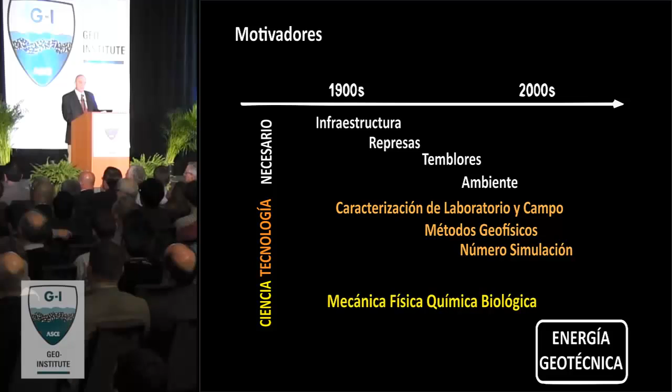Now, whenever we were challenged by these new needs, we looked back into the foundations of knowledge. We went back to the sciences. We re-explored the mechanics, the physics, the chemistry, and more recently, the biology. Today, I would like to do the same as we explore the energy challenge.

Why energy? Well, because whenever we seek the ultimate goal, which is to have a pleasant life with great quality of life, we see that it is basically controlled by the availability of energy. It is so much so that if we plot most quality of life indicators, they exhibit a great correlation with power consumption, that being life expectancy, infant mortality, ability to receive an education.

Some of these parameters can be combined to make it even more predictive of future energy needs. And in this case, there is some combination here of those parameters into an index that we call quality of life. We see the very strong correlation with power consumption.

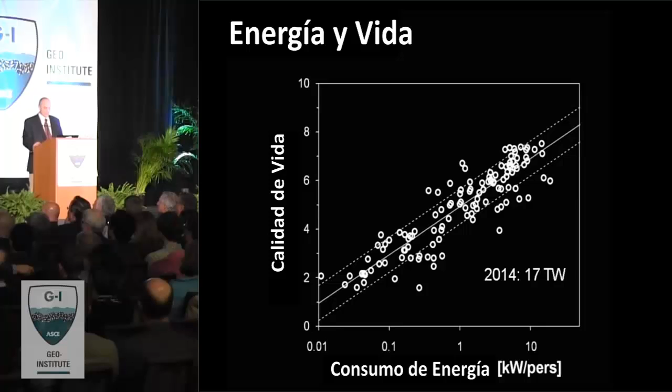Furthermore, we can track these numbers for the last 2 or 3 decades, and we see that there is a very clear trend. All countries are improving quality of life. That is the good news. But we're all doing it at the expense of consuming more energy, to a point that this may become unsustainable.

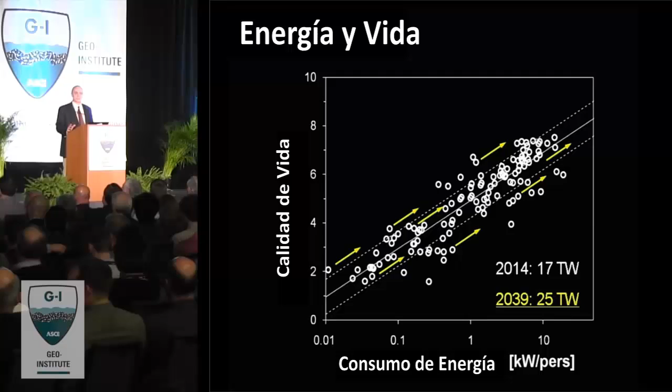Today, we consume 17 terawatts. That is a huge number. And in the next 25 years, we're going to have a demand for 50% higher energy consumption. Let me put this in perspective. That would be approximately 10,000 nuclear power plants of the largest ones we've ever built, and we have only built about 500 in the last 60 years. This is the amount of additional energy that we will have to produce to sustain current growth.

So I think that as geotechnical engineers, we have to think very seriously, what can we do to contribute to the development of a sustainable energy solution whereby the developing world can increase quality of life with minor increases in energy consumption, while the developed world can decrease power consumption while still improving quality of life.

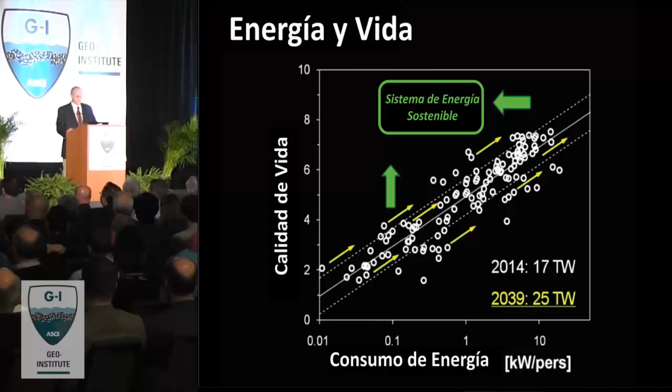In order to understand some of these problems, it is good to go back to see what are our energy sources and what is the origin of those resources. Let's focus on one of them, which are fossil fuels. 85% of our energy or more worldwide is based on fossil fuels. That means coal, gas, and petroleum. And you may wonder, how did those form? Well, let's look at the history of the Earth as geotechnical engineers.

The Earth is approximately 4.5 billion years old. At the beginning, it was abiotic, and life appeared approximately 3.5 billion years ago. During that early stage, the atmosphere was basically a heavy CO2 atmosphere, but microorganisms fed with energy from the sun began capturing the CO2, converting it into organic mass, organic carbon, and releasing oxygen, and that had a tremendous effect changing the atmosphere. In fact, many of our minerals today are oxides and carbonates, both of them the result of the effect of these microorganisms.

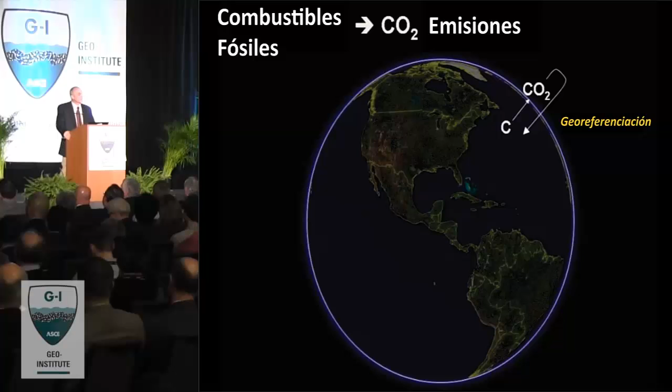When we analyze all the energy resources, we can go one by one, and in the manuscript you will find fairly extensive energy cards where I summarize all these geotechnical needs. There are few lines that are common denominators for all the energy resources. We need to do proper site characterization, to get the right material properties for design, to develop proper monitoring strategies incorporated into reservoir management and disposal management, and to design the infrastructure not only to build it, but also to retrofit it. And why not to decommission it? We are in the process of decommissioning major nuclear power plants with great challenges, I may add.

Furthermore, there are great needs for energy storage, as well as for the storage of energy waste, being fly ash or nuclear waste, or CO2. And of course, there are plenty of environmental related issues, and why not make our processes more efficient and conserve energy in so doing?

So as we are facing such a great challenge, we have to go back to the fundamentals, like Terzaghi did in the 1920s. This is a wonderful quote. Terzaghi said, Coulomb purposely ignored the fact that soils consist of individual grains. That was very useful for a while, but in fact it became an obstacle against further progress. So we need to go back and recognize that soils are made of grains in order to advance.

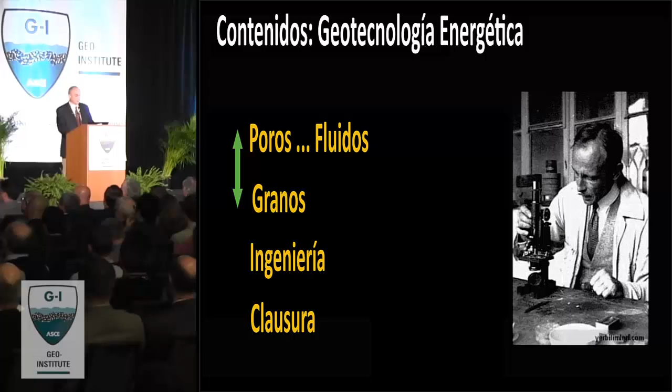And I'm taking that once again today, almost 100 years later, for the second part of the presentation, which will look at the essentials of soils. And we are going to see the grains, but also the counterpart, which are the pores, and the components that fill the pores. That means the fluids. And then a couple of evolving engineering problems. So let's start with pore fluids. And you're going to see a sequence of nice movies and images. But once again, the important thing here is to understand the complexity of multiple processes that coexist.

And the reason why fluids become particularly important in the energy sector is because there are so many of them in so many different phases. In our field, we have basically considered water and air, vapor, and to some extent the LNAPLs and DNAPLs. Now the variety is much more extensive. So let's make a brief list. We can encounter gases, not only air, but also methane and CO2. CO2 with pressure and temperature becomes supercritical, or it could liquefy. We also find water, and in many places we are looking for layers filled with brine. Oil, of course, that will range from light to heavy oil, and sometimes solids will precipitate, or liquids may form ice or hydrate. We will observe some of these as we move along.

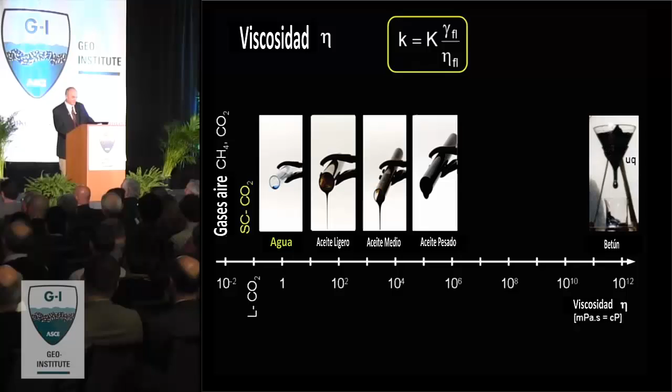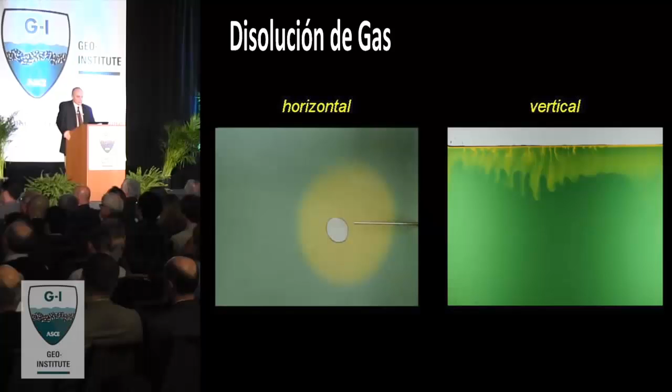Now, when we have gas and water, and we begin pressurizing, the gas tends to dissolve in water to different extents. On the left-hand side, you saw a droplet of CO2 dissolving in water. Water has a pH indicator, and what you actually saw is that as the CO2 was dissolving in water, it was acidifying, forming carbonic acid. That is the low pH of Coca-Cola, and it was diffusing away into the soil. These are all time-lapse photography, so they are played at high speed.

On the right-hand side, you saw that the CO2 is on top of the water, and as the water intakes the CO2, it becomes heavier, and it creates these tears and convective currents that will sustain the process going. This is the dissolution of gases in liquids.

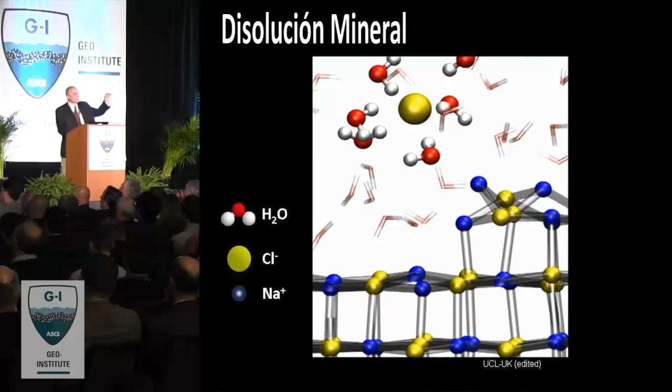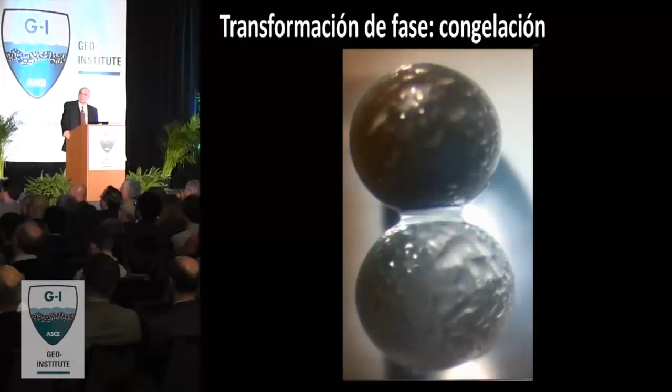Now, if we take a droplet of salt water and we let it dry and we watch it carefully under a microscope, it gets to a point that the water cannot have more salt in solution, and salt begins reprecipitating. When there are phase transformations, the water freezes, and it will all depend on whether the water likes the mineral or not. It will actually form an ice sheet on top, or it will just remain localized at the contact.

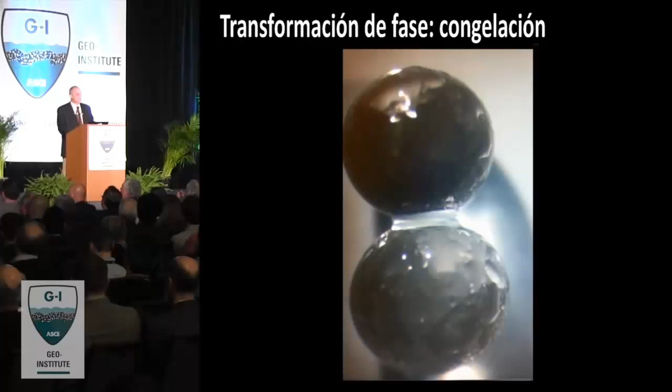But there is one type of phase transformation which is quite exceptional. Typically, when water freezes, it excludes anything that is not water, for example, ions. However, if there is methane, the methane molecule can get locked in, trapped, surrounded by water molecules that form a cage. This is called methane hydrate. It takes relatively high pressure, let's say 600 meters beneath the ocean, and low temperature in order for this to happen.

But you may be surprised to know that we find methane hydrates offshore pretty much everywhere around the world and beneath the permafrost. And there is more carbon trapped in methane than in coal, petroleum, and gas. So this could eventually become an exceptional energy resource, with a caveat that if it gets released into the atmosphere, it's a devastating greenhouse gas.

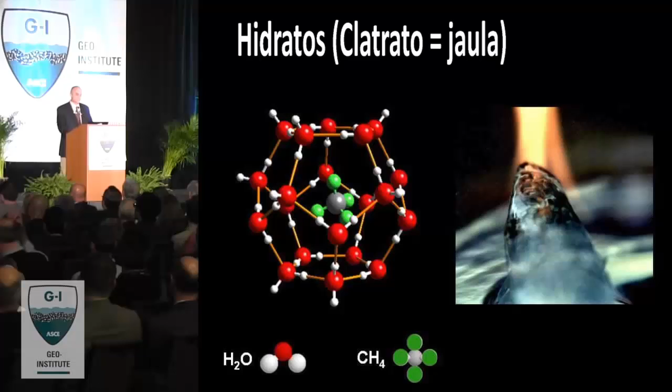Another part of the fluid-related processes that we need to recognize is that there are many of these processes that produce very pronounced volume expansion. Of course, we're all familiar with the expansion of water to form ice. That is only 9%. When we open a Coca-Cola can, it will expand probably 50%. If we take methane hydrate, the one I just showed you before, these little cages of water with methane molecules inside, it will expand 176 times, not percentage, times.

And of course, the wonder of the steam engine is that when water vaporizes, it expands more than 1,000, almost 2,000 times. Let's put that into perspective. When we take a soil and we shear it and we measure the volumetric dilation, that rarely exceeds 10%. So now imagine having these fluids that will expand hundreds of times. What will it do to effective stress and then soil behavior?

In fact, what you see there is a little sketch of a little methane hydrate crystal at the center that will expand when we reduce the pressure. When we sample it, it will expand this 176 times. And it will develop capillary forces that will push grains out. And what you are going to obtain with standard sampling is something that looks very much like chocolate mousse, a completely destructured sediment that is impossible to characterize. We will come back to this.

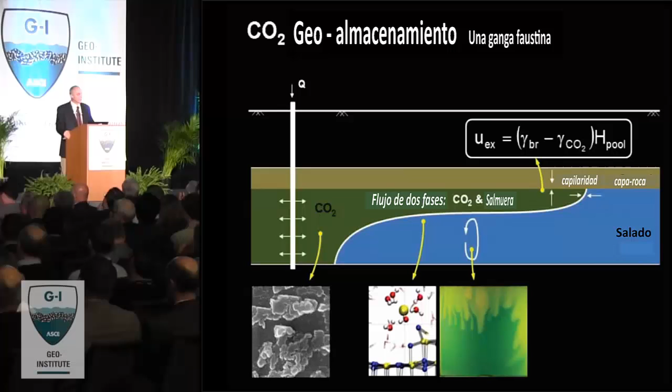To summarize the first part of pore fluids, we can encounter them in many different phases. They have a very wide range of properties. They will trigger dissolution and precipitation exsolution processes. There will be phase transformations, and in many cases, those will be accompanied with very large volumetric changes, which will dramatically affect soil behavior.

If there is anything that in our field we have made great advances, and that we are the holders of understanding that nobody else has, is in unsaturated soil behavior. And as you saw earlier, this is all going to be pretty much about mixed fluids. So my question now is, for all those of you who work in the field of unsaturated soils, how easy it is to transport our knowledge to other energy-related applications.

Well, it all starts at the molecular scale. The reason why we can float a paper clip is because of the formation of this interfacial membrane that develops at the interface between two fluids with limited miscibility. On the left-hand side, in the lower part, you see water surrounded by methane molecules at low pressure. There is limited compensation of intermolecular forces. But as we increase the pressure on the right-hand side and we have a higher gas density, there is better molecular interaction, better compensation, and interfacial tension should decrease. Therefore, interfacial tension is pressure dependent.

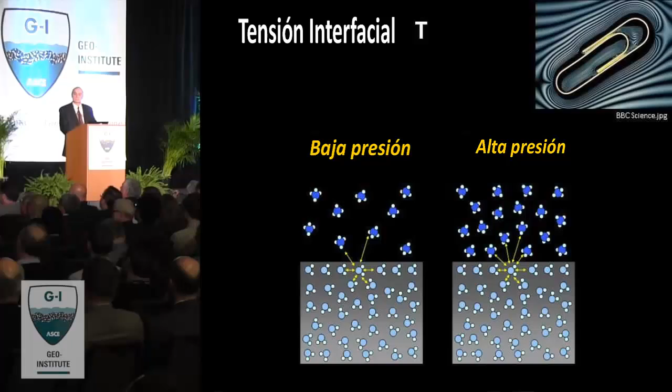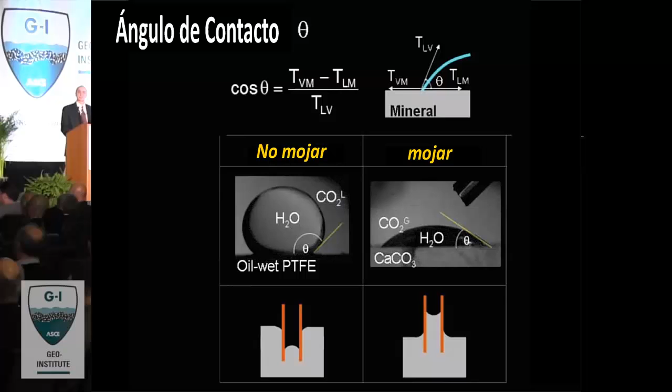Now, when we have the two fluids interacting on the mineral surface, the contact angle then also becomes pressure dependent. And the fluids may like the mineral, depending on their mutual preferences, or not. And typically, we always talk about capillary rise. That is when the water likes the mineral. But you could have negative rise in the case of, for example, oil or mercury. So we have to pay attention to these two parameters in understanding unsaturated soil behavior in the largest scale of energy applications. Let me demonstrate that this is indeed the case, that pressure alters these parameters.

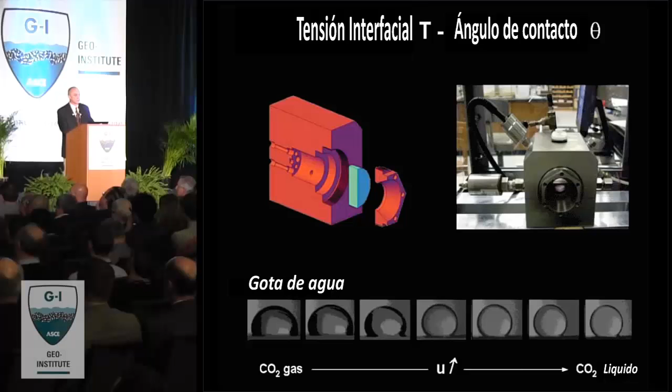You are watching through a very thick sapphire window at the water droplet on top of Teflon. We surround it with CO2. We begin squeezing the CO2, increasing the molecular density, and you see how the water droplet changes the shape dramatically. The reason is the contact angle is changing. The CO2 likes Teflon more than the water does, and the interfacial tension is changing. This is going to happen within the reservoir.

To summarize, in our field of unsaturated soil behavior, we have consistently thought of pretty much water and air. That is 72 millinewtons per meter surface tension. But actually, this can change in a wide range, and we can actually engineer it with detergent, with surfactant, and bring it down to very low values indeed.

At the macro scale, there are a couple of fundamental concepts that we use extensively. One is suction, the pressure difference between the two fluids, and the net stress, which is the difference between the boundary stress that we apply and the air pressure. The other macro scale concept that captures pretty much the structure of the soil is the soil water characteristic curve that gives us an idea of how the fluid is interacting with the pore size distribution and pore size connectivity in the sediment. I will not mention much more about the entry pressure, but it's going to be a very critical parameter in many aspects of the energy cases.

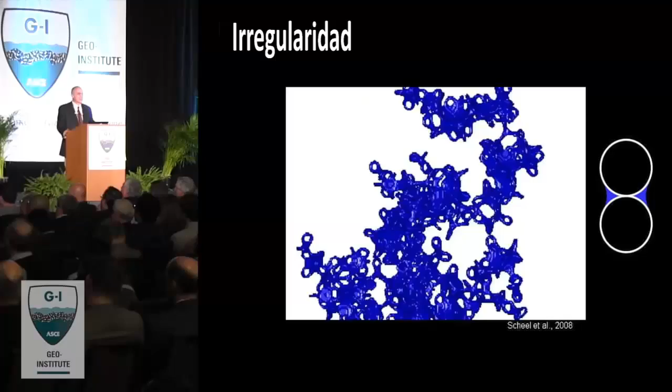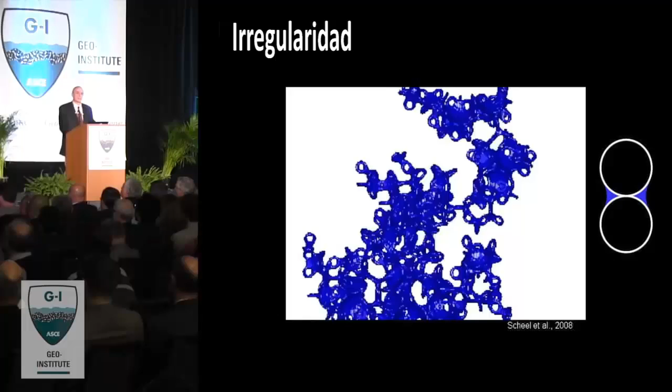And you see that these water menisci form interconnected patches of water, and everywhere else, there is pretty much no water. Therefore, imagine the interparticle forces with the addition of the capillary forces. This is quite a complex and inhomogeneous situation, which adds some complexity to our understanding of unsaturated soils.

Precipitates would like to do so in the largest pores. So if we have hydrate formation or mineral precipitation, this will occur in the largest pores, and if we close the largest pores first, our soil water characteristic curve will be significantly affected, particularly on the right-hand side, where the entry pressure is. Now, if we begin dissociating the hydrate, the soil water characteristic curve is changing because we're removing that solid. And so we have a continuous time-dependent process adding significant complexity to all these analyses.

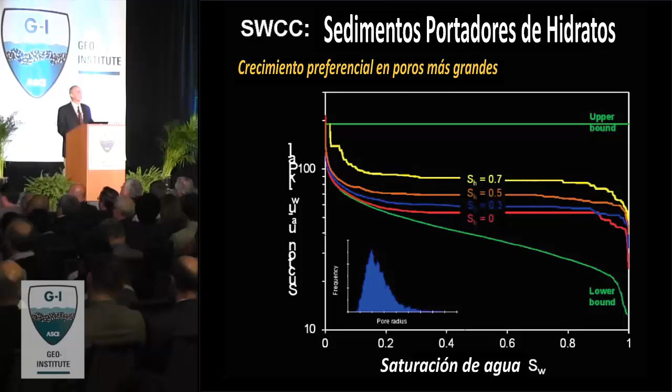Another departure from what has become classical in unsaturated soils is the fact that in unsaturated soils, the air invades quite homogeneously the previously saturated medium. However, when you open a Coca-Cola bottle, you create bubbles, you nucleate bubbles everywhere. That means that when

water with dissolved gas or oil with dissolved gas, what is called foamy flow, or hydrate begins dissociating, we're going to see gas developing everywhere, like you see on the lower micro model on the lower set of images here. The upper part is when there is invasion. The lower part is where it nucleates everywhere. So we have to rethink what are the implications to the soil-water characteristic curve, the Van Genuchten equations, the relative water and gas permeability, etc.

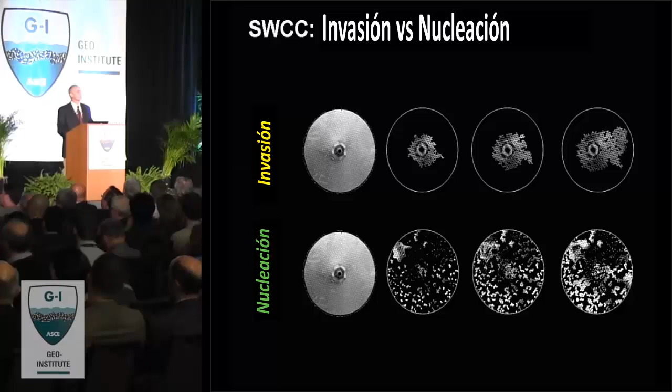Finally, in this reanalysis of unsaturated soil behavior, I would like to highlight that we tend to assume that there is thermodynamic equilibrium. That means that things have homogenized throughout because it has been the result of a slow process. In fact, many of these tests take typically 6, 8 months or 1 year to do a proper soil-water characteristic curve test.

However, that is too long for the removal of petroleum or gas. So there will be no thermodynamic equilibrium, and in fact, what is going to happen is that we're going to mobilize viscous forces. And if we're injecting CO2, remember supercritical CO2 has much lower viscosity than water. Now that CO2 is going to go through the largest interconnected pores and is going to finger through, and the rest of the brine is going to remain behind. We're going to have very inefficient invasion when we inject CO2.

By the way, conversely, if we were pushing a very viscous fluid against a defending fluid, a saturating fluid which is low viscosity, we are going to have a more homogeneous front. So on the lower half of this plot, we have classical unsaturated soils. On the upper part, where velocity gains relevance over capillarity, we have to begin looking at the relative balance between the fluid viscosities.

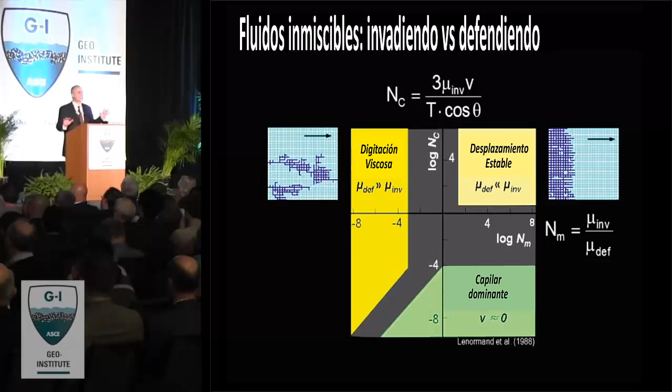Without any further demonstration, I would just like to say that it may surprise you, but the same way we talk about interfacial tension between water and air or water and oil, vinegar and oil, there is also interfacial tension between water and ice, water and hydrates. And so we can extend all these concepts to all these other materials.

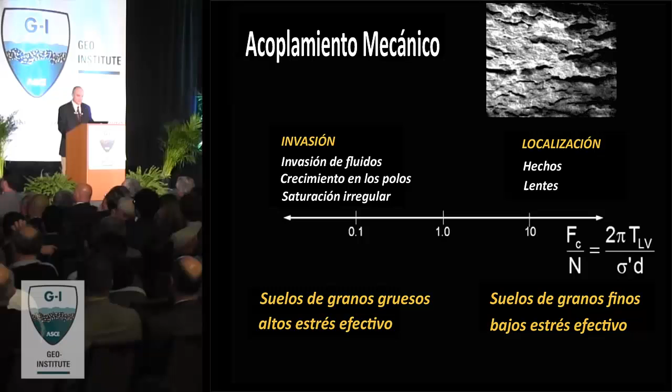And for example, if the capillary forces are greater than the effective stress-related forces, and that will happen when the effective stress is low or the grains are very small, then the capillarity will prevail, and we're going to form gas-driven fractures. We're going to form ice lenses, hydrate lenses. Otherwise, when effective stress is high and capillary forces are small, the diameters are large, we are going to have a completely different invasion mechanism and pattern of solids.

To summarize mixed fluids, we need to recognize the wide range of fluids that are involved and their phases. The surface tension and contact angle are not constant anymore, and in fact they vary with pressure, and we may control them, we may engineer the system. The residual saturation that we are concerned about in unsaturated soil behaviors is what controls our ability to recover gas and oil. In fact, we leave approximately 50% of the oil in the reservoir because of residual saturation.

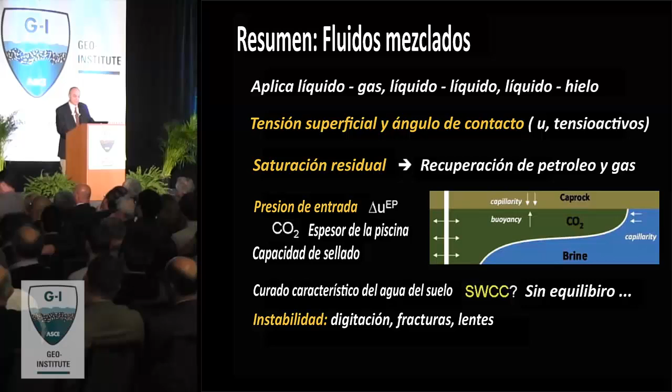That entry pressure that we didn't say much about is the one that is going to control how far that pancake of CO2 is going to spread out and whether the seal rock will be able to hold the pool underneath. That the soil-water characteristic curve has to be reconsidered, and that there are several instabilities that may affect the process, and we need to understand them better to analyze these systems properly.

That was one part of the presentation. We were looking at the fluids and the pores. Now I would like to look at the grains that make the sediments. We are going to do it in 3 stages: the genesis, to pay attention to post-formation changes, and I will highlight why, and then to look back and reconsider classification of soils.

We typically talk about genesis as weathering of rocks followed by a transportation agent. Well, when we look at the whole energy sector, we run short with such descriptors. In fact, we have to look at mechanical, thermal, biological, and chemical processes in the formation of grains. Few slides to demonstrate the case.

Mechanical forces are big enough when the grains are large, so the impact between grains can cause damage, or the abrasion between grains can alter their shape. Therefore, mechanical forces can only explain the formation and evolution of coarse grains and few silts, for example, beneath glaciers.

Thermal processes are also very critical. This is an artificial one, man-made, which is fly ash. And because it formed from a melt, you see the effect of surface tension in this nice spherical shape of fly ash. By the way, the fly ash had lots of gas during the formation. Some of these will be hollow, and some of these will be like cenospheres.

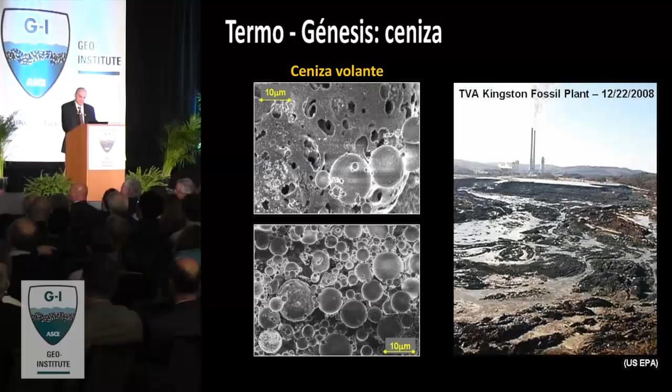Some of the consequences are, for example, seen here in the failure of the TVA Kingston storage, almost 6 years ago now, 5 years ago. The natural example of that is volcanic ash.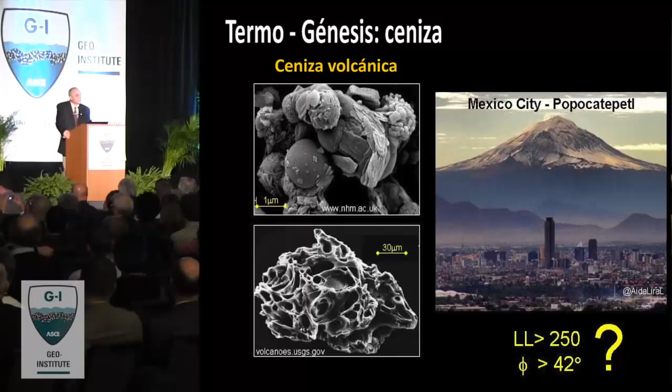However, how can we explain that the soil with a liquid limit that can reach 400 can exhibit a friction angle that can exceed 42, 44, 46 degrees? Well, we need to look at the other genesis, which is biogenesis. There was lots of bioactivity in the lake, and that led to the formation of diatoms.

And whenever we encounter diatoms in our soils, being here the Cooper marl or Ariake clays or Mexico City clays, we always see exceptional combinations of liquid limit and friction angle that we cannot explain otherwise.

When we go offshore, and here I'm showing an example from the Ulleung Basin between South Korea and Japan, we encounter complete layers. You still see some diatom here, but everything else here is crushed diatom. Very small pores, huge porosities, behavior that is non-plastic, yet very high liquid limits.

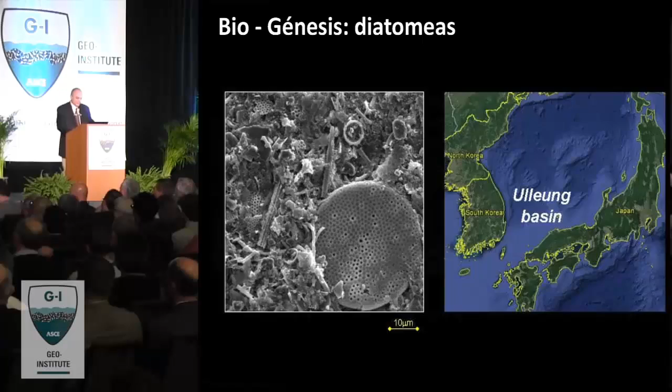Precipitation of salt is the mechanism that leads to the water-mediated formation of clays. These are all, in most cases, precipitates as well. And in fact, you see the importance of the crystallographic structure prevailing and the formation of these classical shapes, leading to kaolinites, illites, smectites.

So we saw that there are different formation mechanisms leading to different particle shapes, different sizes, and different mineralogies. Let's explore the consequences of size.

When we analyze all the forces acting on particles, and those are the forces that cause motion of particles, there wouldn't be strain, there wouldn't be shear without unbalanced forces at the particle level, then we realize that these forces all depend on particle size, either linearly, quadratically, or cubically.

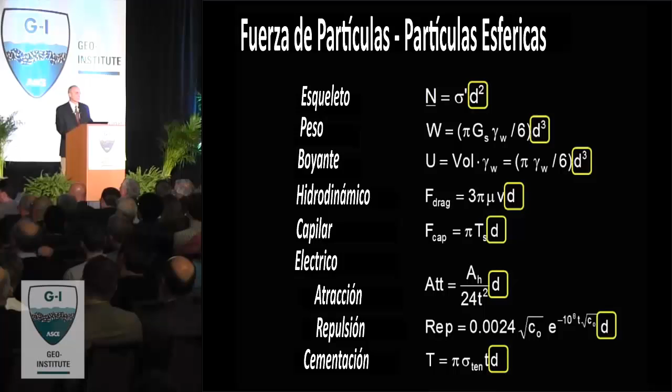In order to explore the effect of electrical forces, I really have to look into strains because it's more difficult to analyze their balance. And so when we do that, we compute the strains that a soil will exhibit by changing deionized water for brine. That will alter the double layers, the van der Waals attractions, etc., and that will cause a strain, and that strain will be basically zero until we reach the submicron particles.

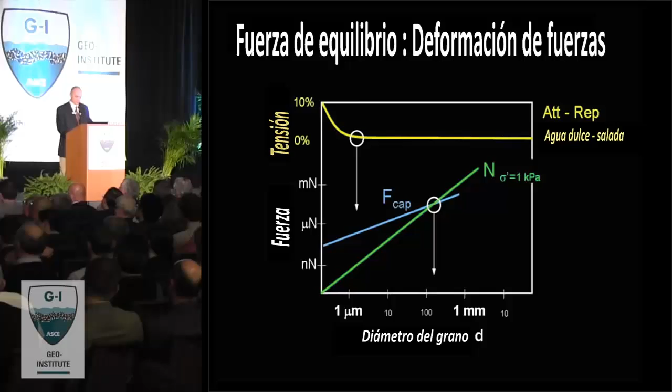Therefore, there are two very important ranges here where the physics changes. For small particles, we have to begin paying attention to capillary and electrical forces. Summary. We have already seen the relationship between genesis, size, shape, and forces. And what is very interesting here is that that is where the sieve 200 is. The sieve 200 is an exceptional choice. It's more than just a convenient choice for laboratory purposes. It's an exceptional choice from a physical point of view.

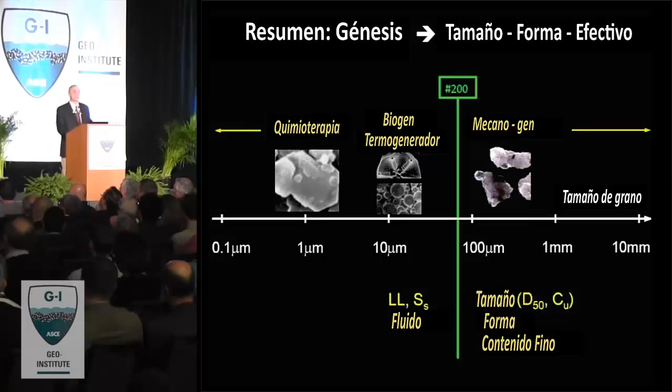Furthermore, in order to better understand the fine grains, we have to pay close attention to the fluids. In the coarse grains, we need to add a little more information. Particularly, we have to emphasize particle shape, not only size and uniformity. So we saw that there are different geneses, the importance and implications of genesis, and the relevance of the sieve 200.

Most of our engineering projects have been for, let's say, one generation. Somehow we have decided that the next generation has to build its own infrastructure with the latest technology, and so we do like to take a 25, 30-year horizon in our designs. However, when we look into the energy, in many energy applications, we would like the CO2 to remain down there for tens of thousands of years, and nuclear waste probably for 100,000 years. So our time scales now are competing with the time scales of geological processes.

Remember, fly ash is changing in 1 week, and Mexico City soils and Colombian volcanic ash soils form in less than 10,000 years. And now we're beginning to think of engineering projects for longer time scales. So we cannot think of soils as being inert anymore, and we have to go back and look at dissolution and precipitation. But this time I'm going to do it from the scale of the soil to see what are some of the implications.

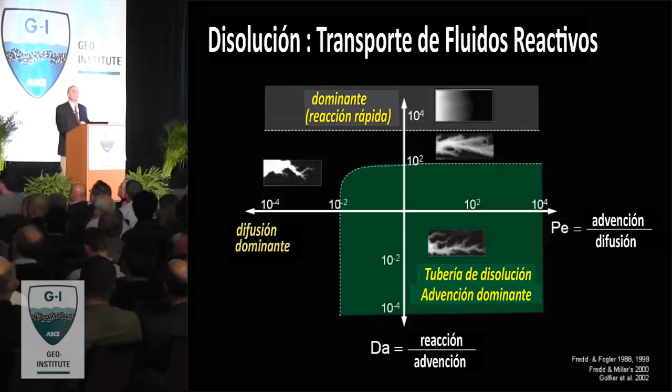What happens in that case? Well, let's see an experiment to see if this is true. This is calcareous sand from here, from the Savannah River site, across the river from Georgia, and we permeate this sand with acidified water. After some time, we take the specimen, this is in an oedometer, and we create a very homogeneous flow field.

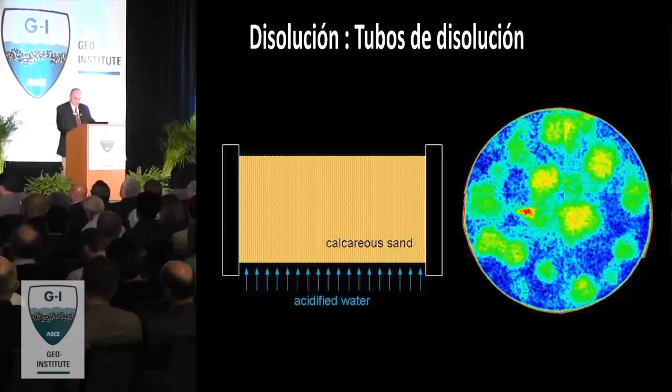Instead of dismantling the specimen, we actually put it in a tomographer, and we take multiple slices, and we see all these fingers of dissolution, where some of the minerals have been preferentially eroded while the quartz remains. And now we would like to understand the implications of this localized dissolution. So we take discrete elements. We also make an oedometer with all the yellow grains. However, in certain preferential columns, some of the grains, we're going to let them dissolve.

Then we see how the forces evolve, and all of a sudden you see that the following force pattern develops. Where there is no dissolution, the grains have to carry most of the vertical load. However, in the columns that dissolve, now the grains are not picking up the vertical load, but they are laterally holding the columns so they don't buckle. And in those dissolved areas, there has been a 90-degree rotation of the principal stresses in the same soil mass.

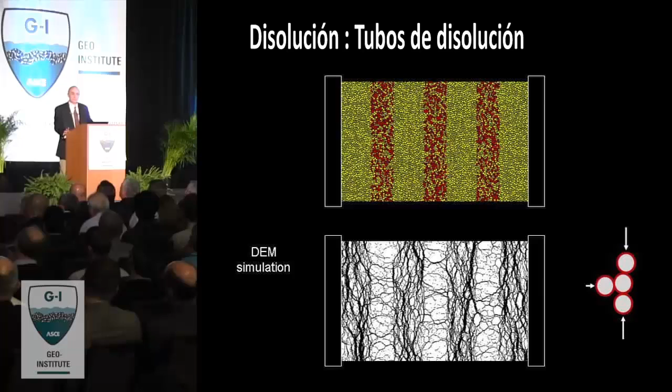The consequences can be quite scary. So in the last 2 or 3 years, while they were building two of the very few new nuclear power plants being built in this country, here in Savannah, near Augusta, Georgia Power, or the Southern Company, decided to actually excavate the upper 120 feet to make sure that they would go below the layer that was experiencing localized dissolution. An expensive proposition, but it was key to avoiding the risks involved.

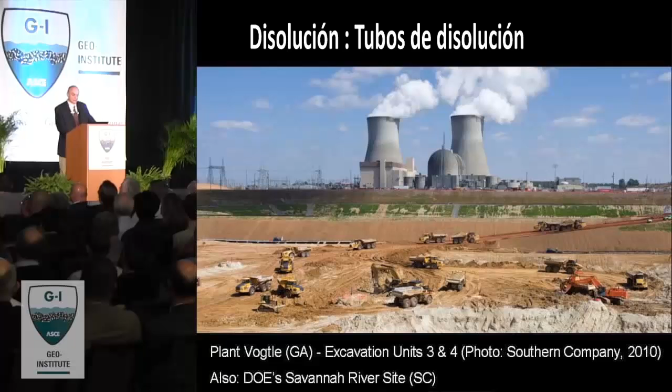Remember that when dissolution is very slow compared to the rate of advection, you have homogeneous dissolution. So let's simulate that in the laboratory once again. This is once again in an odometer cell, but it allows us to measure K0. This is at the beginning, before dissolution. K0 is about 0.6 in this case. And then we start dissolving and see what happens to K0. K0 goes down. It reaches 0.3, and then if we continue dissolving, K0 increases once again.

Now, this low value is Rankine's active earth pressure coefficient. Let me translate that. The soil reached failure under zero lateral strain conditions. We always fail the soil in a triaxial. No, this is in an odometer when the soil is experiencing dissolution.

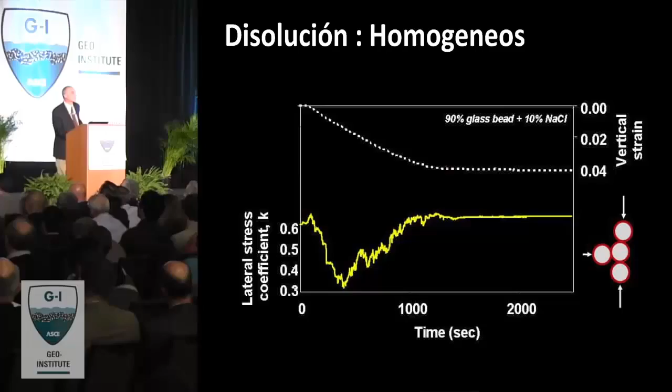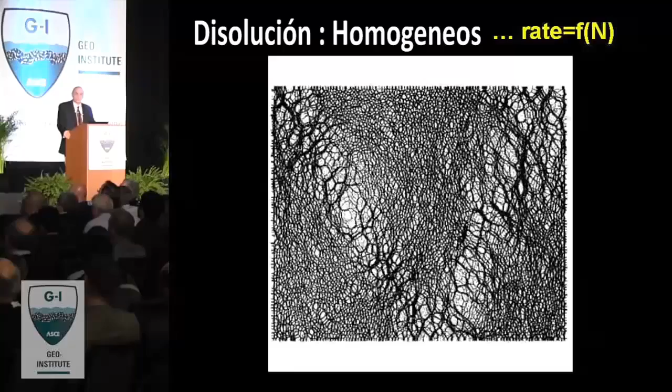And so once again, let's go back to discrete elements to see what happens when we do that. And now we're dissolving grains, and you see that in certain areas, the forces are homogenizing. However, in some bands, the forces are becoming very strong, and in fact, those are shear bands. So not only does the soil fail, but under certain conditions, it may experience shear banding under zero lateral strain.

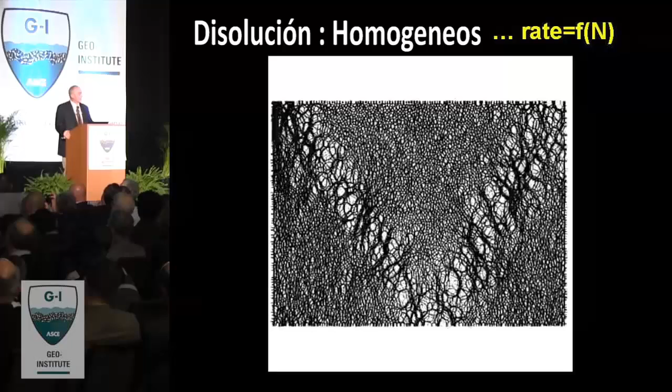And if you think that this is a numerical artifact, let me show you field evidence from all over the world. We encounter these polygonal faults at the bottom of the ocean that cannot be explained with Terzaghi's consolidation theory. And we see that the bottom of the ocean has these lines. These are faults. If you magnify one of these from green arrow to green arrow, you see the discontinuities between layers. And in fact, when you expand this one-to-one scale, you see that they are all at 45 plus phi over 2.

There is no extensional mechanism, there is no tectonics, and the bottom of the ocean, contrary to what you think of Terzaghi effective stress consolidation theory, is massively sheared, with tremendous implications to intercommunication between layers and what we call the geoplumbing.

We've been playing with points and counterpoints. The counterpoint to dissolution is precipitation. If you explore the different forms of precipitation, we begin identifying a few common trends. One is that it may precipitate at contacts, like the formation of loess, typically reflecting unsaturated soils where menisci form. Two, it can cause surface coating. We saw that in ice.

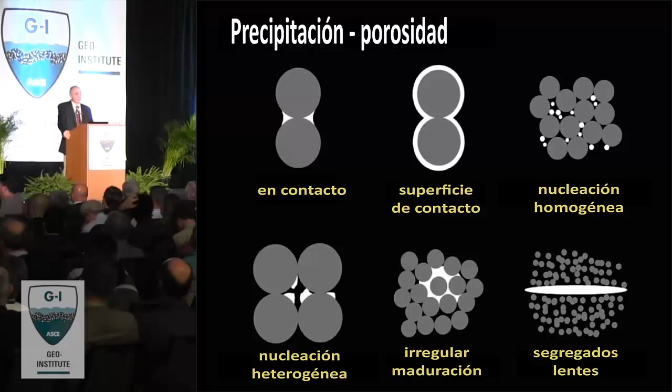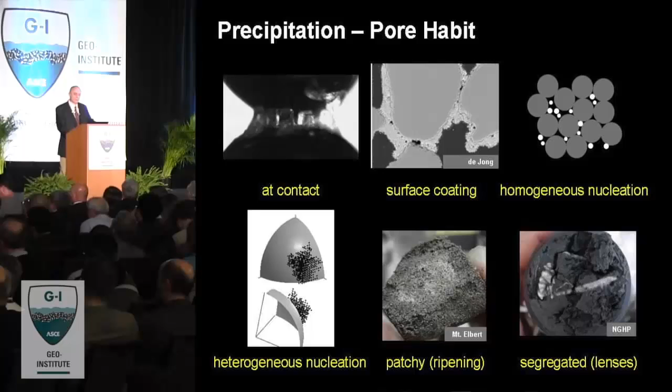It could be homogeneous nucleation in the middle of nowhere in the pore. That is very unlikely. Most likely it will be heterogeneous nucleation, where it will nucleate on the mineral surface and grow into the pore. And if you wait long enough, there is something called ripening, where all those minerals tend to come together and form these patches of cementation. And as we showed earlier, if the forces that these cements develop are strong enough, they may separate grains apart and form lenses. We see that with pyrite, with hydrate and many others, gypsum, etc. These are, once again, analogs found in nature for different formations.

What is the immediate consequence of precipitation? The most relevant one and the most detectable one is the increase in shear stiffness. On the left-hand side, you see the change in shear wave velocity. You see the arrival time of shear waves. As we increase the effective stress, the travel time gets shorter, the shear stiffness gets higher. Then in the lower part, the stress decreases, and the travel time increases. That is an uncemented soil. On the right-hand side, you see exactly the same sand with minute cementation.

The shear stiffness, the travel time is very short, the shear stiffness is very high, and the velocity is constant, stress independent, because now stiffness is cementation controlled. Now, how effective the cement will be will depend on the pore habit, what we described before. How did it like to precipitate?

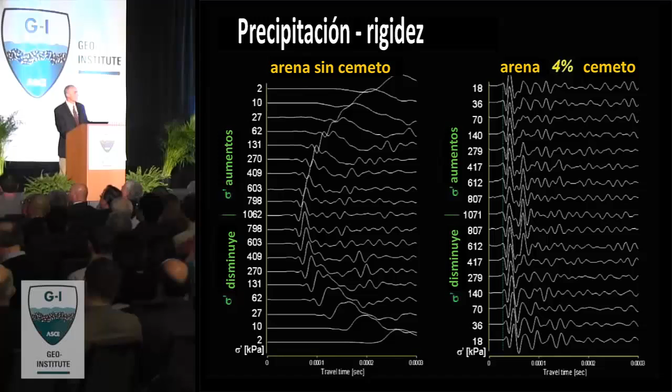And for example, here you see the effect when it precipitates everywhere, a little bit in every pore, or in patches. And it affects the stiffness, the strength, the angle of dilation, the critical state parameters. So pore habit will have an effect as we try to anticipate the evolution of the physical properties of our sediments.

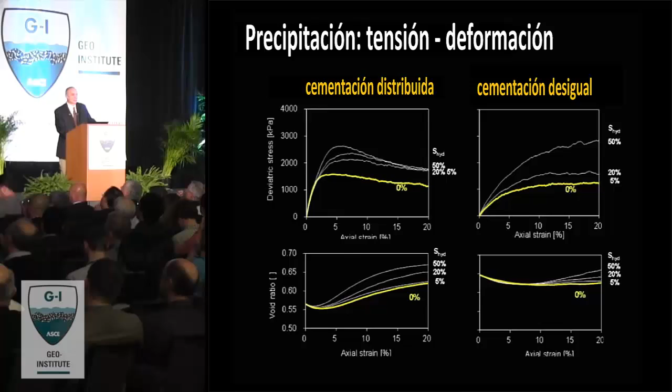Post-formation changes are critical as we begin looking into long-term projects in the energy sector, where the time scales are going to be long. Therefore, as Jim Mitchell reminded us many times in the past, we must change our attitude. Soils are not inert. Dissolution and precipitation processes are probably some of the most important ones that we should consider. And underneath all these, I was talking about coupled hydrochemomechanical processes.

We have spoken so much about sediments that I think there is a good opportunity to reconsider one of those basic concepts in our field, which is that of soil classification. The unified soil classification is the basis for soil classification all around the world, and it is indeed exceptional. Look at the first decision that we make. We use the sieve 200, and we showed earlier what an exceptional choice, physically robust, the choice of the sieve 200 is.

Then we keep going, and if we ask whether there are enough fines to fill pores and affect behavior, if there are not enough fines, then what is important is how well the grains will pack. And so for the clean sands and the clean gravels, we will ask about the coefficient of uniformity. By the way, we should also ask about particle shape, which is as important as coefficient of uniformity in the development of Emax and Emin, in other words, the packing of grains.

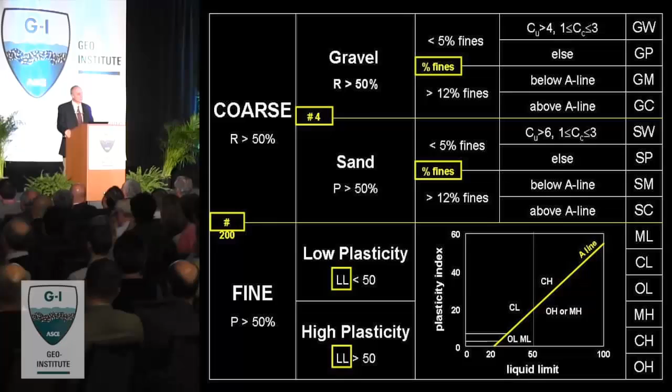On the lower part of this plot, look at the first decision that we make. What is the liquid limit? And the importance of the liquid limit is because it tells us really how much specific surface there is in that sediment. Then we proceed, but at this point, I begin to have a few questions.

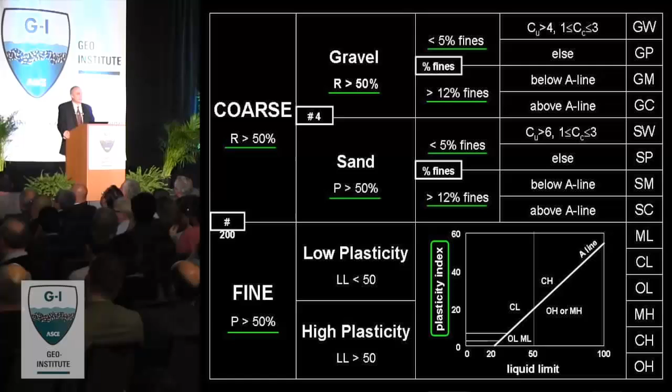We make choices and we choose 50% passing or 50% retained for gravels, for sands, for coarse and fines. And one has to wonder whether this is true soil behavior, or I don't know, a prevailing democratic principle post-war in the 1940s. Then we have to go back and look at the classification of fines. So let's explore some of these briefly.

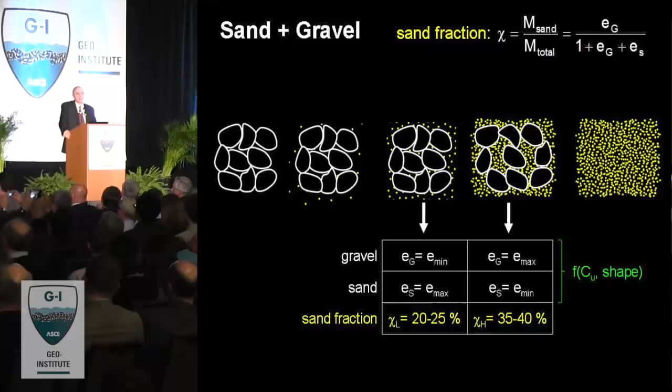If we do some gravimetric volumetric analysis, and we see how much sand we need to fill the voids in a gravel, we can identify two boundaries here. One in which the gravel is densely packed and the sand is loosely packed. That will be the minimum amount of sand that we need. Or the other case in which the gravel is loosely packed and the sand is densest. That will be the maximum amount of sand that we need for that transition.

This Emax and Emin, as I just said, depends on coefficient of uniformity and particle shape, but in general, it appears to be somewhere between 20 and 40%. It is not 50. Soils are not democratic.

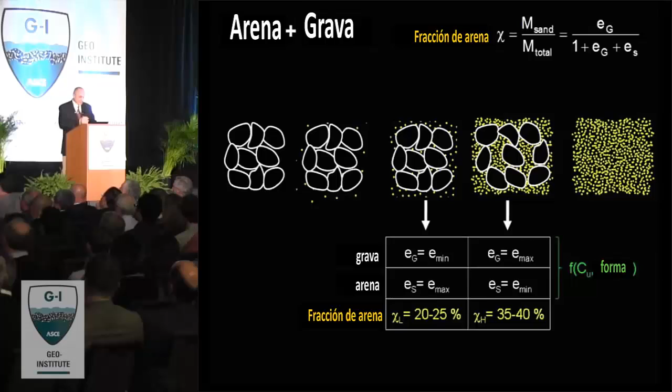Now you may wonder about how we do this analysis for fines. Well, in the case of fines, we cannot talk about Emax and Emin for the clays, so we are going to pack the clays something close to the liquid limit. Let's say at an effective stress of 1 kPa for the lower bound. And we're going to say that the clay is picking up all the load, and we're going to take a nominal load of 1 megapascal for the upper bound.

When we do that, and we take into consideration all these correlations between void ratios and coefficient of compression as a function of liquid limit, we conclude that the boundaries are somewhere between 8%. You already fill all the voids with montmorillonite. You have plugged all the porosity. Your hydraulic conductivity has dropped by 10 orders of magnitude.

And that you actually pick up all the load somewhere when you have 25%. And at that point, because the compression lines converge at higher stress for the different clays, it really doesn't make much of a difference whether you have a high or a low plasticity clay. 25% is our number there.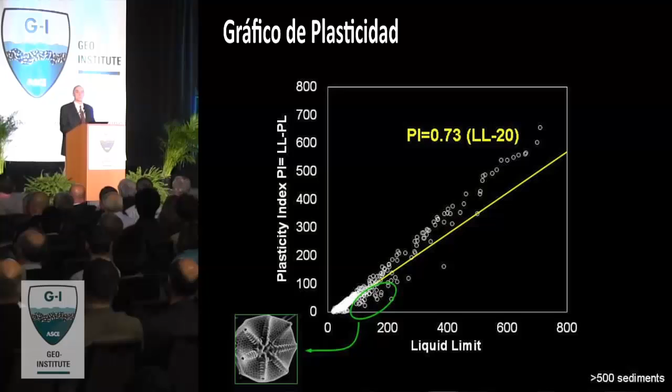The second one, we have to wonder, how come there is such a strong correlation? Well, the reason is, this is the plot of the plasticity index versus the liquid limit. The plastic limit is very small. So basically, we're plotting liquid limit versus liquid limit. And that is the A line. And then, what were they trying to do? They were trying to make sure that the liquid limit was not the liquid limit of a clay. They were trying to pick up the presence of diatoms and organic matter. From an energy point of view, probably trying to pick up when soils are becoming electrically sensitive may be a more important decision to make as we move forward.

Summary, let me suggest, this is just a suggestion at this point, how should we probably enhance our unified soil classification? We should change those 50-50 percentages for the definition of coarse and fine, and for the mixtures of sands and gravels. And probably we ought to be thinking of calling something like the DIN norm does, some transitional soils in between.

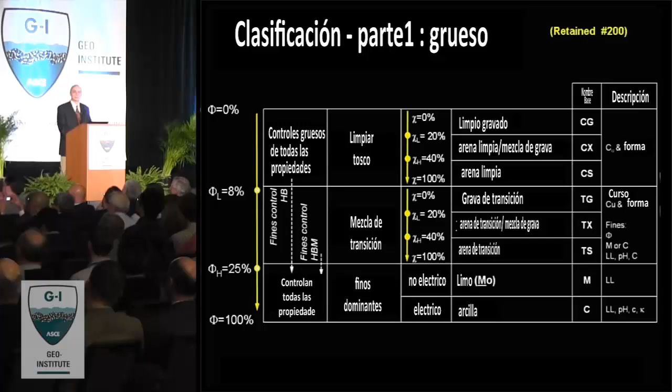For the fines, what is important is indeed the liquid limit. But in order to make sure that we don't have at high liquid limit a diatom versus a montmorillonite, we ought to be looking at the electrical sensitivity, and it could be as simple as running liquid limits with deionized water and with brine. Now, the concept of clay changes once again, and we're going to call clay those soils that are electrically sensitive, which is probably a meaningful definition in the thinking of all the possible fluids that will affect our applications.

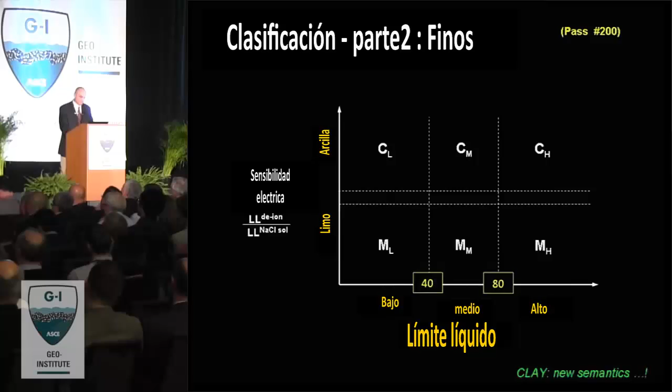I would like to finalize this section on sediments by saying that the unified soil classification indeed has great physical insight. It's amazing the great intuition, and more than intuition, great physical understanding we had a century ago. However, we have gained much knowledge since, and probably we ought to consider updating the unified soil classification so it becomes more meaningful, so the labels and the behavior bring together a better relationship. And we need to add a little more information: on the coarse, the shape; on the fines, the fluids.

The next section is very short, and I'm just going to tie together a few things that we have already said and raise awareness of some challenging problems that are evolving related to the energy applications. Remember that sketch. That was the large volume expansion that hydrate experiences when we depressurize it.

Hvorslev wrote an amazing manual in 1949 for soil sampling, but they didn't face the problem of gassy flow or very expansive conditions that we face in many of these applications where we start with high pressures. So how are we going to conduct sampling and testing when the material that we get out literally looks like chocolate mousse? Let me show you what is developing nowadays.

This is the idea. We go to the middle of the ocean and we push down something that looks like a piston sampler but has a big ball valve at the bottom. And so after we core or we push the sampler, we start retrieving it and we close the ball valve and we lock in the pressure. We bring it all the way to the surface with the full pressure, 20, 30 megapascals inside.

So while the sediment may have experienced the de-stressing and all the sampling effects of changing effective stress, at least it still has the fluid pressure, the dissolved gas, the hydrate, without dissociation. Once it is at the top, it is in an autoclave that is presented here, the core being in orange, and we connect it to a series of tools.

We couple them, we build the pressure on the left-hand side, we equalize pressures, we open the bridge, and now we go and grab, with a telescopic arm, we grab the core. We bring it back in, we depressurize, close the ball valve, depressurize the bridge, disconnect the autoclave, and now we have it here waiting for the tools to come in.

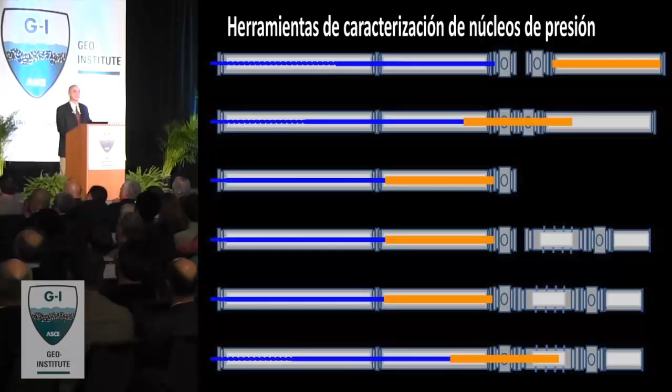Remember, I want to cut the core, I want to run a triaxial test, a direct shear test, an oedometer test, a flexible wall permeameter, without ever removing 20 or 30 megapascals, 2 or 3 kilometers of water of pressure. And so the next step is we bring the tools, we connect them, we build the pressure, we equalize the pressure, we connect, and now we transfer the sediments into the tools where the different measurements will take place.

Here, indeed, it has been built, and here are some examples. That is a hacksaw. That is the same hacksaw that you have in your machine shop, but it's working internally at 30 megapascals. And this is a direct shear box, a double ring direct shear box. And this is an oedometer, which allows us to apply the effective stress back again without ever depressurizing. And it has a flexible wall permeameter if we so desire. And it produces exceptional data for sediments that could otherwise not be tested in any meaningful way.

The next topic that is going to be critical is that this long duration infrastructure and facilities and systems are going to experience a large number of load applications. And these loads could be thermal cycles, could be relative humidity cycles, like in compressed air storage in caverns, or once again, thermal cycles here showing energy piles, or effective stress cycles, like the foundations of wind turbines.

And that brings us back to Leonardo, who conceived the idea of the ratchet, where there is a displacement and a locking mechanism, in our case, friction. And so every time we displace, then it gets locked in by friction, then we displace more, and the system may begin crawling, and it may have significant impact in long-term performance.

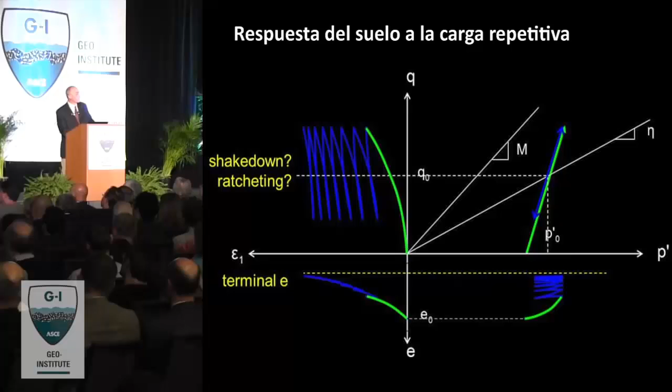From the point of view of the deviatoric load, now it may be that the accumulation of deviatoric strains arrests and the system reaches what is called shakedown. But they may continue going forever. And in fact, if you look at that geomembrane, during the cooling and heating cycles day and night, it began wrinkling because of thermal ratcheting continuously going down, with all the implications that Kerry Rowe has told us about those wrinkles.

Now, the analytical models, the algorithms, the experimental devices to confront these new types of loads are in their infancy, and we really need to devote much attention to them. Just a simple example here underneath the wind turbine. At the beginning was the result of the static loading, and now the 100,000 cycles are being simulated, and you see the gradual accumulation of vertical deformation and changes in void ratio that may indeed affect the long-term performance of this foundation.

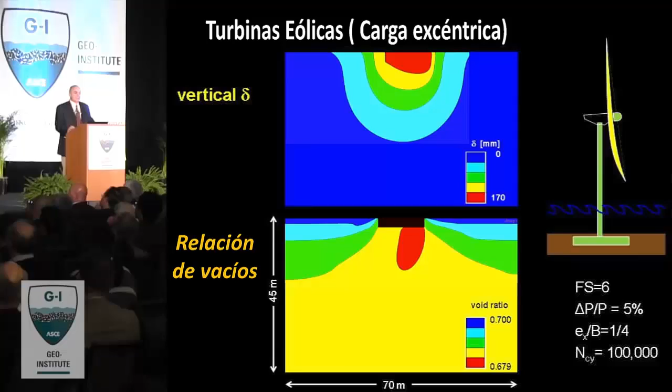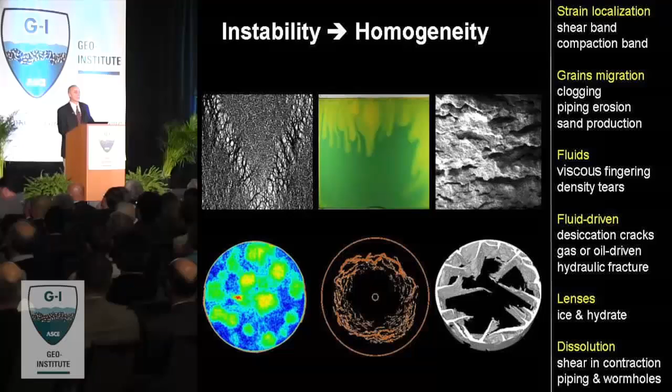And finally, throughout this presentation, I have given you several examples where things are not homogeneous, as Coulomb said. In fact, where there is not only spatial variability in the materials, but actually the processes themselves cause spatial variability. Remember the dissolution and the shear bands, the tears and convective currents with gas dissolution, the formation of gas-driven fractures, dissolution pipes. I didn't mention this one, but this is clogging during fines migration when we produce oil, or ice lenses when we freeze soils. We have spent the last 40 years talking about shear bands. There are many other instabilities that will affect our interpretation and our analysis of our systems.

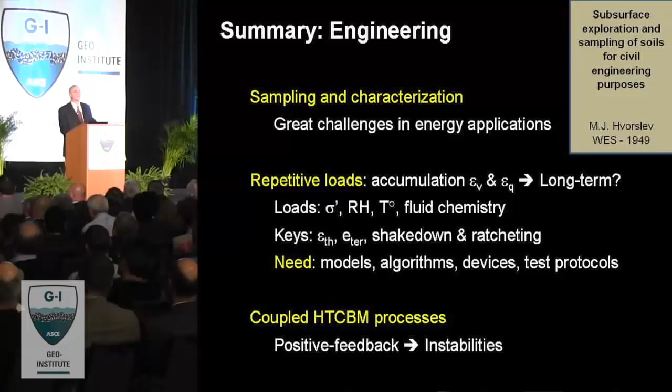Summary of these engineering developments: sampling and characterization, it is amazing what Hvorslev told us. We have significantly great challenges facing us. This is all us. This is our field. Repetitive loads will affect the long term. They can come in many different ways, and we are just at the beginning of developing proper models, algorithms that do not lead to accumulation of numerical errors, devices and test protocols to actually measure constitutive parameters. And now I'm extending what I said earlier. We have hydro, thermo, chemo, bio, mechanical coupled processes, and some of those couplings lead to the emergence of confusing instabilities.

Closing thoughts. I hope I was able to convince you that energy is indeed critical to life, and that the energy challenge is huge because we need to increase access to energy by 50% in the next 25 years. There is a beautiful synergism here between our field and the energy field. For us, energy stimulates us to gain new insights into soil behavior. For the energy field, we are critical. We are at the core of the development of a sustainable energy solution for the world.

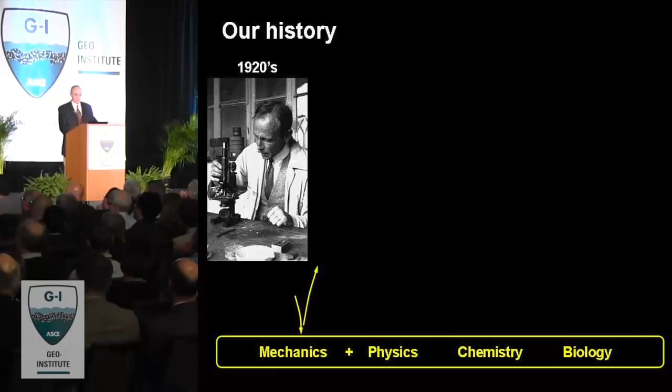Every time we've been challenged, we have gone back to our foundations. Terzaghi did it, the earthquakes did it for us, environmental contamination, now again, in the energy sector. And I think that we ought to welcome this. It's an opportunity, an incredible opportunity to re-energize our field. Look, on the left-hand side, you see the table of contents of our typical courses. And we see that energy geotechnology is nothing new. It's just extending what we know and making sure that we recognize that there are much higher effective stresses, a wider range of temperatures, a wider range of fluids, and the long-term duration of these projects.

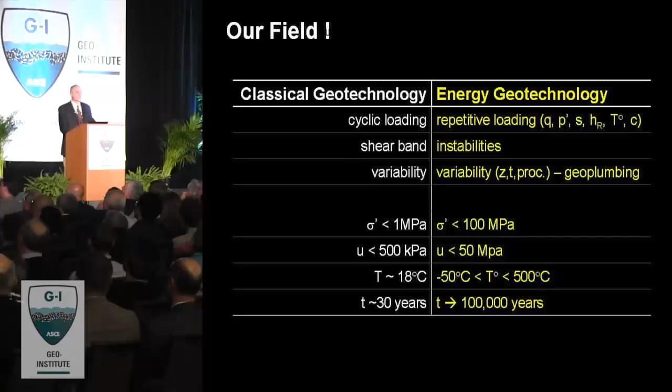For the younger members in the audience, for those in their early careers, I think that you are going to be at the prime of your careers confronting this unprecedented global challenge. For those in practice, there is indeed an infinite number of great engineering problems out there, and let me add that it comes with great resources. For those in education, I think it's time that we prune many of those obsolete and confusing semantics and misnomers that we have in our field, that we renew our emphasis on the basics, and that we extend our curriculum to cover all the aspects that we need. And for those in research, it is indeed just fascinating. In all cases, I think that this is a time of exciting challenges, opportunities, all that with a spice of some sense of urgency.